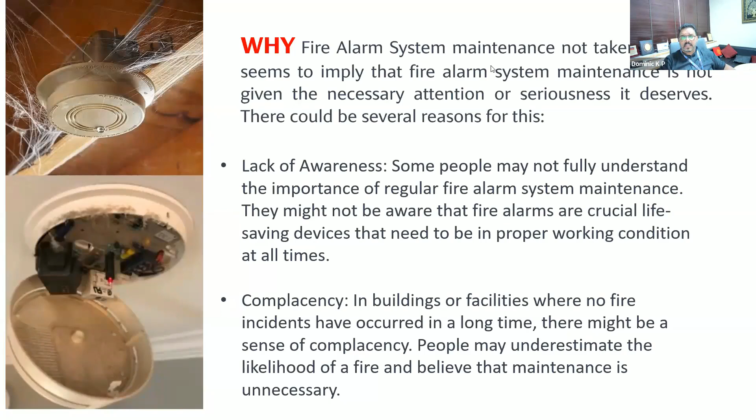In some cases, budget constraint. You go to some apartments or commercial buildings, the allocation for maintaining the safety system is so negligible. We have freelance engineers taking up AMC, and it doesn't even cover his fuel charges. Just because of the livelihood, he just takes it saying, okay, I will do the maintenance.

What do they maintain? How do they maintain a fire alarm system in a building? They think it's like any other maintenance, just clean the fire panel, make sure the LEDs are blinking, open the panel, remove the dust from the control panel and move away. Do they really open up each detector? Do they know who licensed them to test the smoke detector? Do we have a certification of engineer to certify that he is fit enough to test the fire alarm system?

Again, the lack of budget causes lack of priority, expense, because it's a non-ROI. It's not going to return on investment, so there is no question of maintaining. And again, lack of enforcement.

Our fire department today, I am from Bangalore, today I am talking from Bangalore. There is a shortage of firemen. How can you expect the fire department to come and test your building to see if the fire alarm will work? So it's quite tough for the authorities to come and check. Though it says once in 6 months or once a year the department has to come and check, then they will give NOC or renew the license to the building.

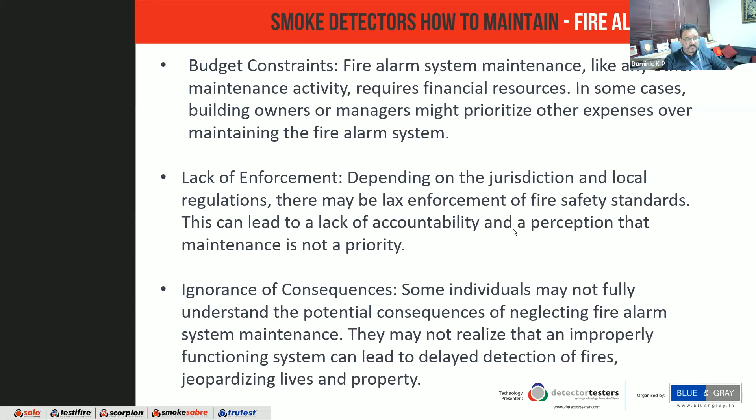How important it is for you to maintain. The fundamental question is whether you know it's a smoke detector, how does it function? The ignorance today is causing huge losses to the country, losses to the property, losses to the life.

Inadequate training. We have chief engineer electrical, we have maintenance engineer in a building, we have housekeeping guys. But how many of them are trained within the premises, not depending on the contractor to come, even though there is AMC? Are we trained to maintain a fire alarm system?

Majority of them don't know how to check the fire alarm system. Today, fire alarms are monitored by a security guard who is there temporarily. When you ask him, do you know what this is, they just say it's an electrical panel.

They don't even know it's a fire alarm system. Generally, when you read the message on the panel, it says battery switched off, alarm on different zones or floor detectors, but no action is taken. In many cases when we audit a building's fire alarm, there are a lot of faults you can find on the panel.

So it is an individual's importance, an individual interest, that we must go through a certain training process. And there's a time constraint too, everybody is busy.

Yes, when you go to a hospital to maintain a fire alarm system, they say today we have a lot of patients, you can't go remove a detector because you are obstructing the business. Though there is a contractor who wants to maintain it, our business priority does not allow us to test the smoke detector because our priorities are different.

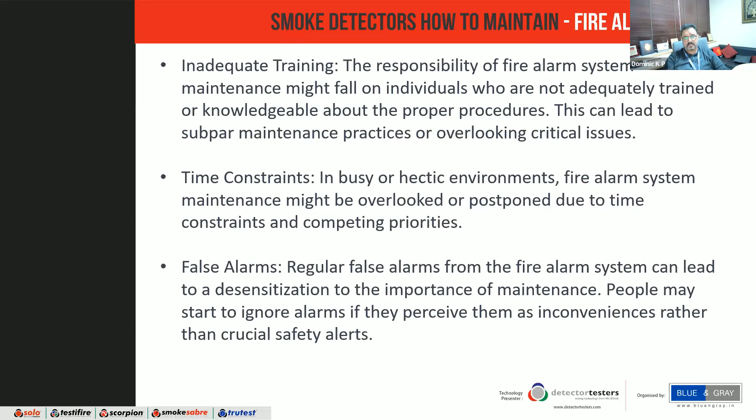So overall, ensuring fire alarm system maintenance is taken seriously is important. Today, the advancement in maintaining the smoke detector has made it easy, it's not complicated. You can get data on how it is maintained. So to make you understand how we are progressing, what technologies are catching up, and how it is enhancing you with equipment that can maintain your fire alarm system.

Please understand, just because you have a fire system doesn't mean you are safe. You need to adequately budget the maintenance cost for it. You need to have equipment within the premises to maintain the safety system, alarm system, or protection system. Do not take it for granted that nothing's going to happen to you, because you don't know what happens tomorrow.

Fire alarm is necessary to notify you if there is smoke or fire in a building. Please take this training, this webinar, seriously, because we are here to help you make sure your fire alarm does work when it is required. Let's make safety a way of life.

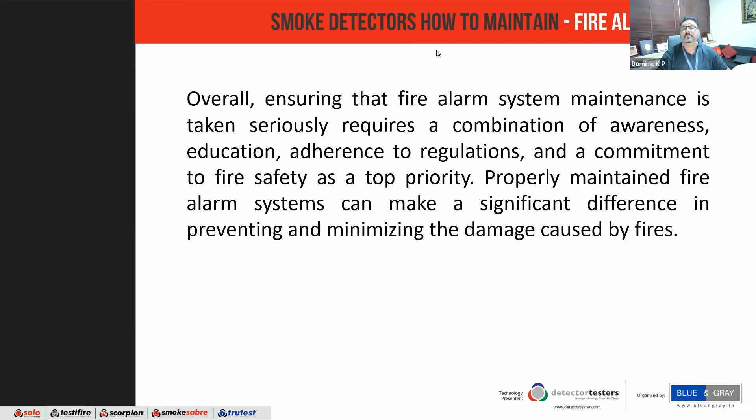I'm giving the screen to you, I'm going to stop sharing my screen. Over to you, Parul. I can't see your face, can you probably come forward? Yes, that is better. We can see your lovely face, Parul.

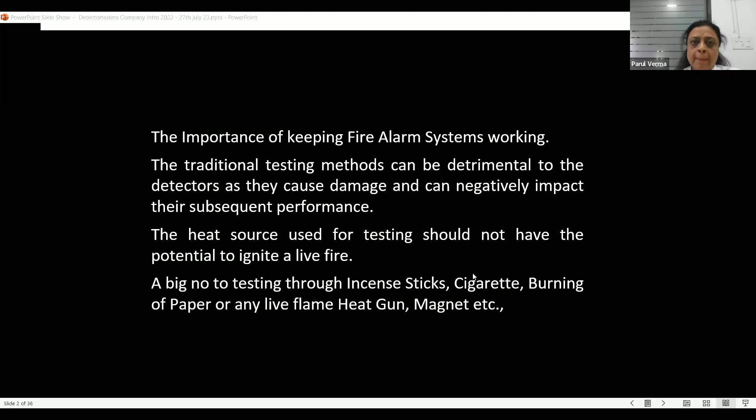So now we come to the question of why should we be testing fire alarm systems and smoke detectors. I meet so many people, and the awareness level is so low. People say, what is the need to test when we already have a fire alarm system in place? The building is anyway secured with a fire alarm system.

But no, that's not the case. You've installed the fire alarm system for keeping the occupants and the building safe. But then a functional test, why is it important? To prove that the detectors would respond when there is a fire, when smoke enters the detector chamber and communicates to the panel. Only then do you come to know whether the system is working fine or not.

When you see the LED blinking, or when you see the analog values on the panel, you conclude that the fire alarm system is working fine. But that only means the current is running through the cabling and the circuit is working fine. That doesn't prove that the detectors and the fire alarm system are working fine. We need to also test them by proper functional testing.

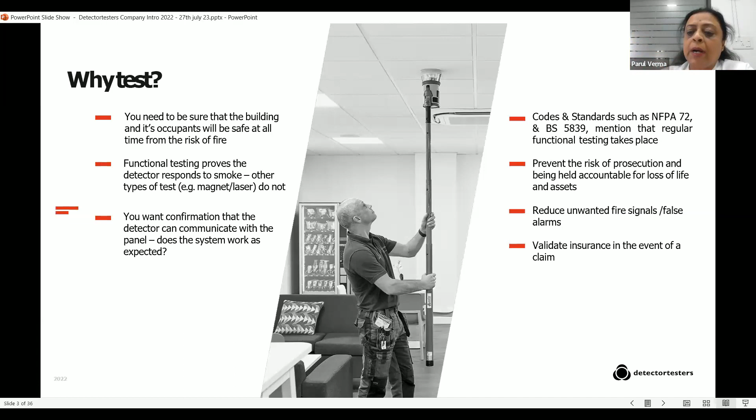Even the codes and standards mention that functional testing should be done, which will prevent not only the risk of prosecution - these days, with fire laws becoming so stringent, there is a risk of being prosecuted - but you can also validate insurance in the event of a claim. And the main thing with functional testing, which we at detector testers do, is unwanted fire signals and false alarms are reduced so much because of that.

Even the industry codes and standards tell us very clearly that functional testing is very important, yet we have never even known about this. I have been in the fire alarm industry for the past 20 years, and Dominic has been here for ages, but even we have not given the kind of importance we should be giving. That's why I took up this challenge and joined detector testers, because I understood the importance of functional testing. I thought, why not let everybody in the industry know about it and make people's lives and properties safer if we start following this.

If you see BS 5839, the industry code which we all keep hearing about in our tenders or specifications, it is at times quoted. And in this it is mentioned very clearly that the smoke detector should be functionally tested. By functional testing, they clearly say that smoke can enter the detector chamber and produce a fire alarm signal, and when this is done, it should be ensured that the material used does not cause damage to or affect the subsequent performance of a detector.

That's why I was mentioning earlier that we should not be using cigarettes or incense sticks or any such methods which can cause damage or affect the subsequent performance of the detector. Like when the detector was opened, which we saw earlier, there was a lot of contamination inside - all caused by false methods of testing.

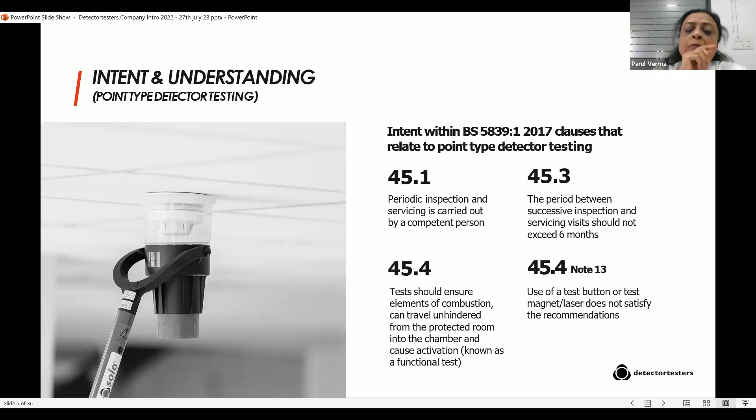Then the problems of having a fire, of course that is a different aspect - even false alarms will not happen. And the tests also say that when a test is happening, the elements of combustion should travel unhindered from the protected room into the chamber. Most importantly, it is told again and again that the smoke or heat should enter the detector chamber - only then will it respond and inform the panel that it's actually a functional test.

Now from BS 5839, let's go to NFPA 72. Even there, it is very clearly stated. We use UL listed detectors, but why don't we follow this when it comes to testing? It is so important that we test smoke detectors to ensure that smoke entry into the sensing chamber happens, using a listed or labeled product. It clearly mentions to use a listed and labeled product. We don't do it - we use incense sticks, which is so wrong. Then we go around saying the detector was not working when the fire happened, but when we are not testing or maintaining the detector, how will it work?

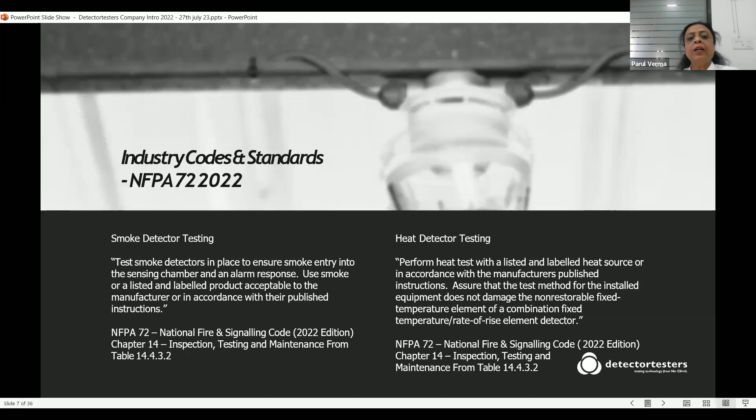The same goes for the heat detector. Again, NFPA says the same thing - perform heat test with a listed and labeled heat source or in accordance with what the manufacturers are publishing. If you look at manufacturers' publications, whether Notifier or Siemens, they also clearly state to use a proper testing method and ensure the test method for the installed equipment does not damage the detectors or cause any problems in their performance thereafter.

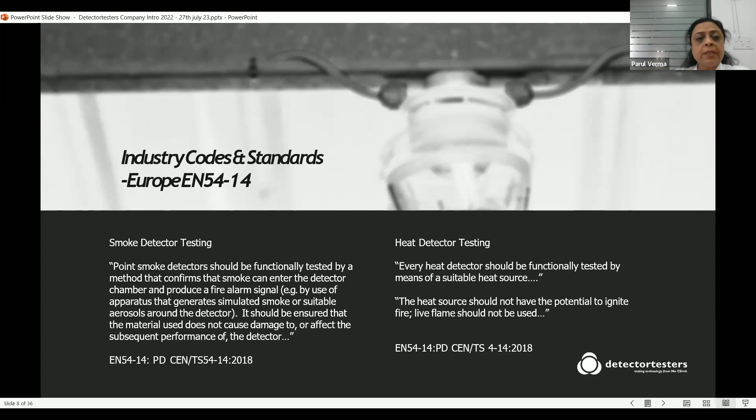If you look at the EN54 standard, the European standard where we are using EN detectors too, it again says point smoke detectors should be functionally tested. Everywhere, every code mentions functional testing, which none of us are aware of. We should start taking this very seriously, so that smoke can enter the detector chamber and produce a fire alarm, ensuring the material used does not cause damage or affect subsequent performance. This is so repetitive - every code and standard mentions the same things again and again, but we have never given importance to this. Let's all start giving importance to it.

Even our Indian standard, IS 2189, clearly says each smoke detector should be tested to initiate an alarm at its installed location with smoke or other approved aerosols. It says 'approved' - a very important word which we always ignore, thinking we can just use an incense stick, agarbatti, and it'll be done. No, that's not the right way at all. We should use proper functional testing with proper labeled and approved means of testing. The methodology should be approved by the manufacturers, and it should be properly labeled and approved.

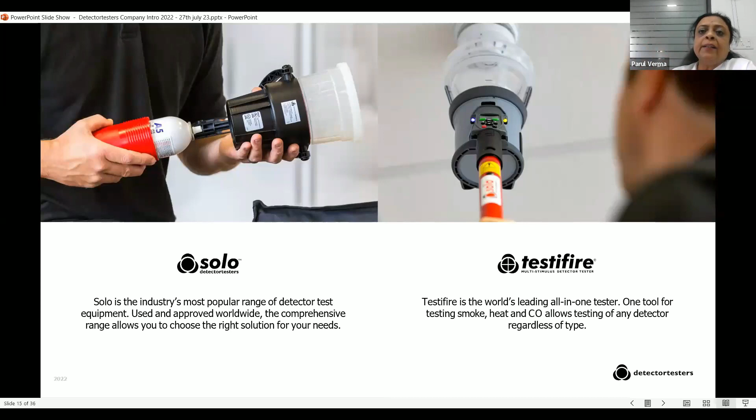Then we have the Testifire, the world's leading all-in-one tester. We call it the all-in-one tester, or multi-stimulus tester, because it is one tool with which you can test smoke, heat, and CO, and it also allows testing of any detector of any type and make.

Then we have the Scorpion. This is the solution for buildings with hard to access areas, suitable not only for point detectors but for ASDs too. Scorpion ensures that all detectors can be tested regardless of their location. I'll come further down to tell you which locations are hard to access.

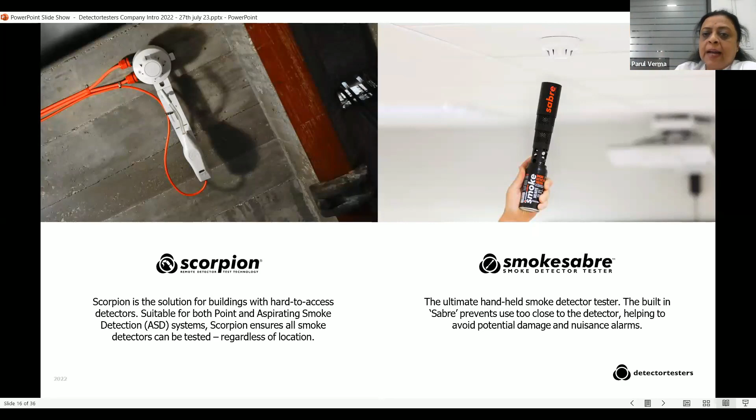Then Smoke Sabre is the handheld smoke detector tester. It has an inbuilt sabre so that it prevents usage too close to the detector, which can cause damage to it. To avoid any such damage, we have the Smoke Sabre.

Going deeper into the Testifire, it's suitable for smoke and heat testing, and it increases productivity on site. Normally you'd take a ladder, with one person holding it and another climbing up, lighting an agarbatti or spraying aerosol directly, which is also a wrong method. This saves a lot of time, increasing productivity, and it's the most compliant testing material for multi-sensor detector equipment.

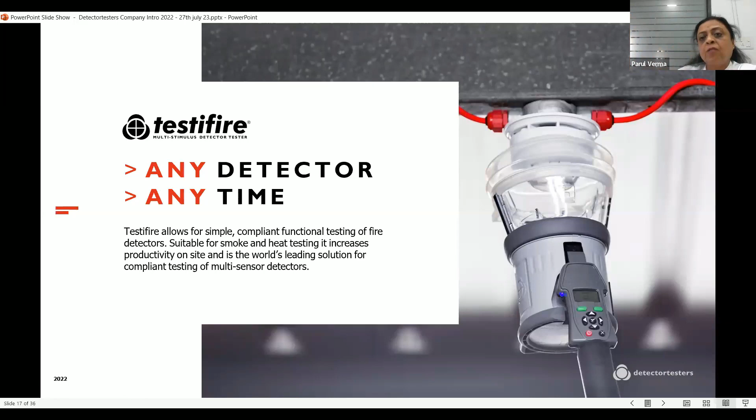With the Testifire, we have two models: the Testifire 1000, for smoke and heat, and the Testifire 2000, for smoke, heat, and CO. You can see the pictures on screen - there's a small compartment on the side where a smoke capsule is inserted, which releases controlled smoke so there's no possibility of over application.

We also have battery batons, the black ones below, which power the testers. Then we have two heat outputs - one that goes up to 90 degrees Celsius, and for high heat areas like kitchens, transformer rooms, or other high heat potential areas, there's a setting that goes up to 100 degrees.

Then, of course, we have the carbon monoxide feature. This bigger model, the Testifire 2000, houses the smoke capsule in the upper compartment, and below it has the CO capsule, used for carbon monoxide detectors in basements or similar areas. There's also a clearing mode. The best part about the Testifire is that it tests not only the smoke and heat detector.

This can do simultaneously or sequentially. Accordingly, you can set it to use smoke then clearing mode then heat, or you can do smoke, heat, and clearing.

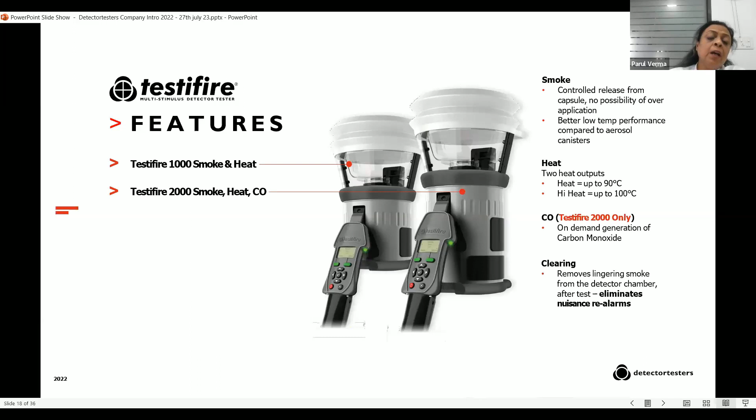Each battery baton can test for 2.5 to 3 hours. One fully charged battery baton can operate, and then it can be recharged like we recharge our phones - in 30 minutes it's fully recharged again.

Then we have the Scorpion - the solution for buildings with hard to access detectors. It is suitable for both point and aspirating detectors, and you can test them regardless of location, like lift shafts, ceiling voids, secure rooms, stairwells, under escalators. Normally, as you see, this detector is permanently installed close to the detector.

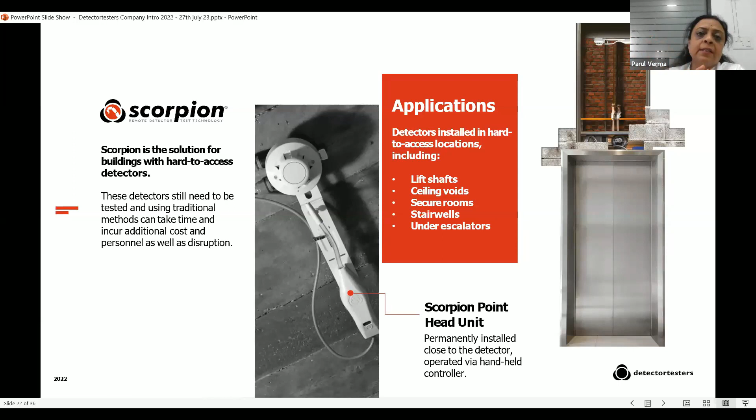It's operated via a handheld controller. There's a tubing system - the tube goes out and comes down if it's above the ceiling or above the lift shaft. Normally we avoid testing these hard to access places, but you have to design it in along when designing a fire alarm system. When detectors are being considered wherever above ceiling, you have to account for these accordingly.

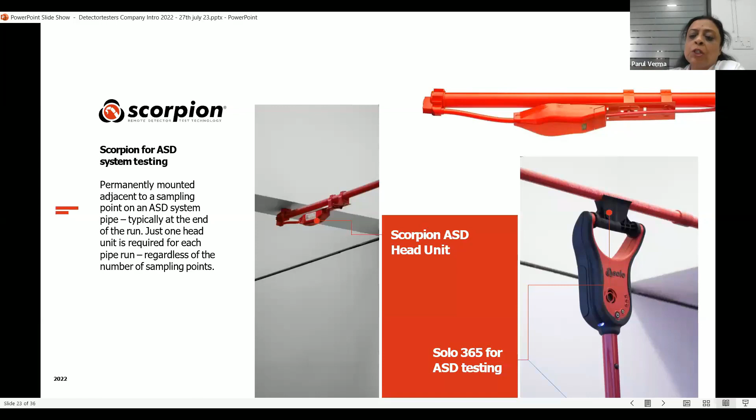This is the ASD system I was talking about, which can be permanently mounted adjacent to a sampling point. The above one is the Scorpion ASD head unit. And here, this is the Solo 365, which I spoke about - that is not only for point smoke detectors but also for ASD systems with an entire pipeline. Just one head unit is required for each pipe run, regardless of how many sampling points you may have in one tube.

Then when we come to dispensers and aerosols, for the aerosol, which is the Solo brand - people at times end up doing direct spraying from the aerosol cans, which is not a proper method. We should use the aerosol along with the dispenser, which comes in two sizes, 100 mm and 180 mm.

These are lightweight and swing frame, depending on the size of your detectors. Why swing frame? Because then you can use them at any angle, whether on a wall or where there's some kind of hindrance in between - you can use them accordingly.

Parul, one second, I'm just putting a pause on this slide. Now, generally, what we have said - buy the can, which is cost effective, and spray at a distance.

We lost you, your signal. I don't know whether my signal is weak or your signal is weak. We can't hear you. So can you hear me now? Yeah, I can now.

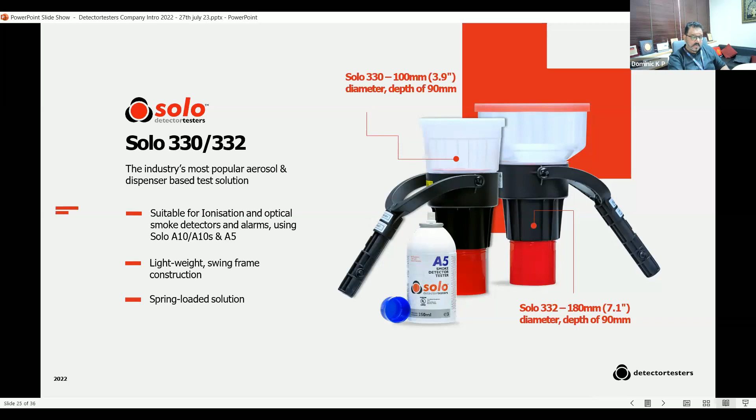These aerosols are also approved by the detector manufacturers, which is very important. That's very good information, because detector manufacturers should have approved these. So what you're saying is it is all approved by the manufacturer of the detector, and it is also UL listed.

Yes, that's what we mentioned very clearly. Use only approved aerosols, and aerosols should be used with dispensers and not contain silicone. Silicone again causes harm to the detectors, and at times we don't know what we are buying locally.

And then even for carbon monoxide, we have these cans which can also be used with the dispensers in the same way I was talking about. So for this we have this Solo C3 for basements and wherever we have parking areas where we use carbon monoxide detectors, we can use this.

And even in Testifire, like I said, we have two models: one is for smoke and heat multi-detector tester, and one is for smoke, heat, and carbon monoxide. So when you go for a Testifire, you're going for a single unit which can test all three types of detectors. Whereas if you go for a solo, you will have to buy smoke aerosols separately, and for carbon monoxide, carbon monoxide aerosols separately, and for heat testing, you will have to buy a third equipment, which is the industry's most popular standalone heat detector tester.

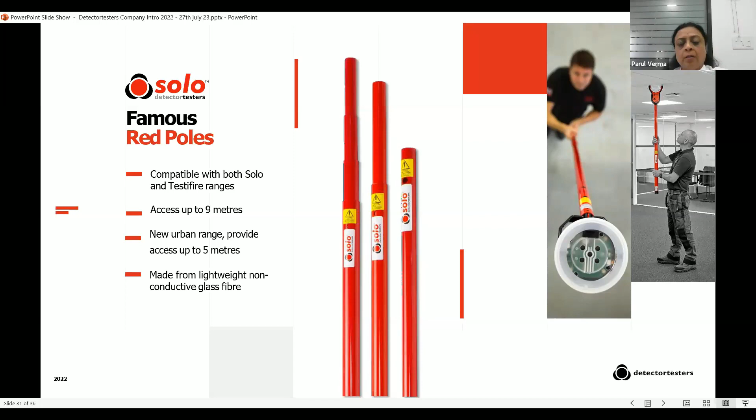Then we have these sleek maintenance kits wherein engineers can keep them and move around easily, and it looks so professional. When your fire alarm systems are UL listed and EN 54 products, then why not even use your testing equipment, which is UL listed and so professionally carried around. Like Dominic was saying earlier, people will say they don't want this, they don't have the time. But you don't need to have time, and you don't need to vacate areas.

In hotels or any of these places, when room maintenance is happening simultaneously, this can happen. It'll hardly take 5 minutes to test your smoke detectors or test anything. So along with the room being cleaned, this can be tested, and they can just walk out. You don't need to stop any work, operations, or disturb your guests.

When people are spending so much money on hospitals, hotels, airports, even the interiors and flooring, then you're carrying ladders and using scaffolding, that can cause a lot of harm to everything else. So it's not just for safety and security, even aesthetics matter a lot.

Parul, the kit that you are showing here is so useful. Generally today, when we maintain a smoke detector the conventional way, you need two or three guys. You need a ladder, and two guys to hold the ladder. One guy going up, and one lighting the agarbatti or carrying the jute box. Generally, the whole area where smoke detectors are being tested becomes a mess.

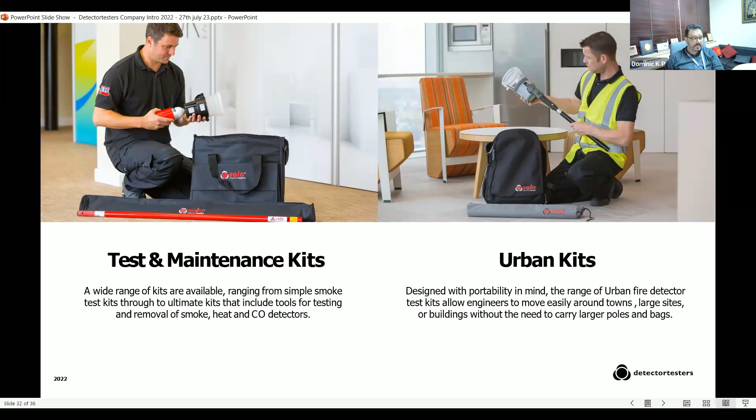Then we have the Solo 200, which is a removal tool. This allows for very simple removal. If you see the picture, there are three kinds of colors.

Once you test the detectors and if the alarm sounds, that means your detectors are working fine. If your alarms don't sound, that means there is some fault in the detector. Please remove it with the removal tool.

The same pole can be used on this, and it can be used at any angle, however difficult or hard to access. It is movable, so you can just insert it, remove the detector, clean it, again install it, again test it. All this will take a total of 10 minutes, I think, the maximum.

And then if your detector works fine, that means it was dusty, it was dirty, it's been cleaned, it's been installed. And if it still doesn't work, that means your detector is faulty, you just need to replace it. All this is so simple, so fast, and so efficient.

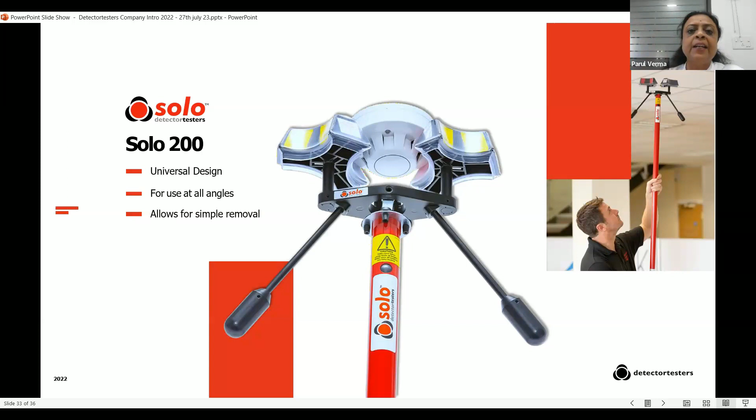You're doing your functional testing, and it will give you so much peace at night that your fire alarm systems are working fine, 100% fine. The functional test gives you that kind of freedom.

And then the aerosols, again, handheld aerosol is the Smoke Sabre. If you see the Smoke Sabre, it comes fitted with the aerosol cans, and then in the middle there's a slight kind of saver which you just, with a flick or press of the button, releases the smoke. So only that much, it depends.

Your detector sensitivity level can be set according to that. This will react, so you can spray it once or twice or thrice until it does. So this is for infrequent people who do infrequent testing in small offices. For that this is used.

This is also approved by the detector manufacturers, and these are also compliant to all the latest regulations and codes, and they are silicone free, and they do not leave any harmful residue like other aerosols. They come in 2 sizes, these are for smaller jobs, as already mentioned here.

Having run you through all the codes, standards, and all about our products, and how they all work, I hope I have been able to convey to all of you the importance of functional testing. For a fire alarm system, the detectors are so important to be kept healthy all the time. So thank you very much for all your time, and I hope this session has been as informative as I wanted it to be.

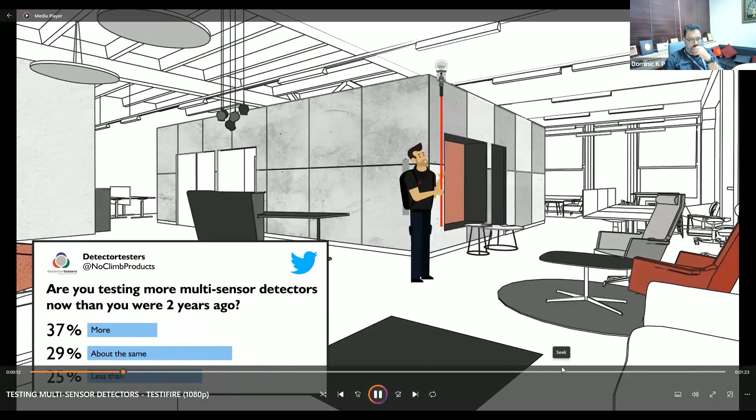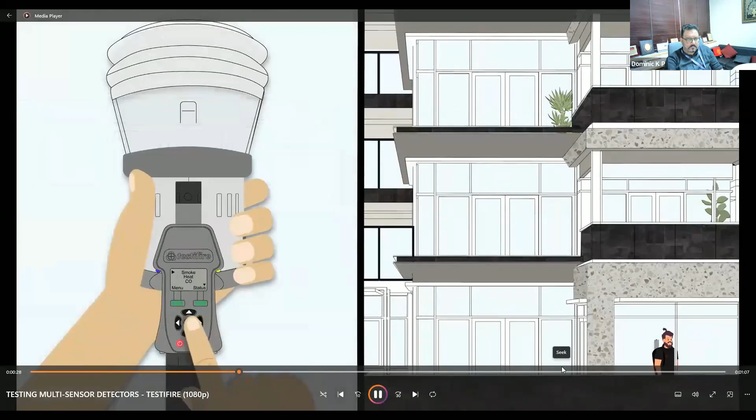With multi-sensor detectors becoming increasingly popular, the ability to test each sensor in a fast, compliant manner has become even more important. The rise of multi-sensors has been recognized within industry codes and standards, which call for each sensor to be tested individually. Testifire, the all-in-one tester, makes this simple. By offering the ability to test smoke, heat, and CO sequentially or simultaneously, Testifire dramatically speeds up the test process, ensures all sensors are functioning as designed and are ready to respond in the event of a fire.

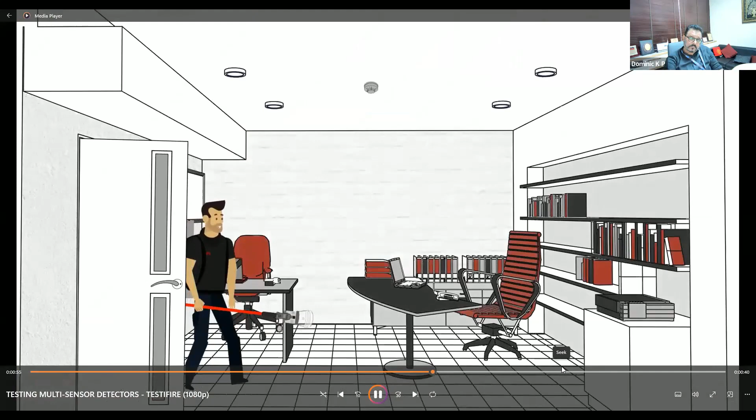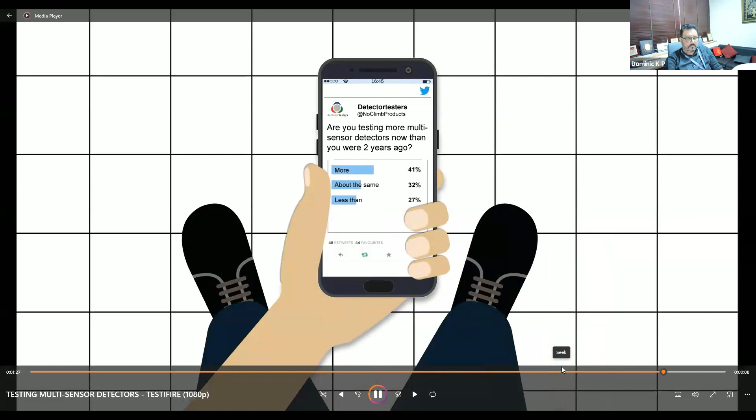As an all-in-one test tool approved by leading detector manufacturers, Testifire takes away the need to carry multiple tools on site and ensures you always have the correct tester to hand, regardless of detector type. The use of non-pressurized capsules makes for easier transportation and storage, whilst the controlled release of smoke and CO leaves less wastage and ensures detectors are safe from the possibility of contamination. Standout features, including the clearing mode and the ability to test heat sensors up to 100 degrees Celsius, help relieve the frustration of re-alarms and improve productivity on site. With 41% of fire engineers reporting a rise in the number of multi-sensor detectors they are testing, and with industry research proving these detectors help reduce false alarms, the use of multi-sensor detectors is expected to continue rising. Make sure you're prepared.

So that is testifire. What is testifire? With multi-sensor detectors increasing, what Parul was introducing is the testifire, which is one single tool to test the optical smoke detector, multi-sensor, and CO.

So testifire looks more advanced, and I'm sure they're coming with data. You can store it, and soon you'll be launching where you can gather all the data of the testing of the detector, download when these detectors are tested - which today is not seen or heard by anybody. Using testifire makes a lot of sense, because it's one tool, much easier for your maintenance team to carry in a building, and you get the information about when it is tested and what is the condition.

So wonderful Parul, very lively and very informative. That we did in the past by British people came, but you've done a wonderful job and very easy to understand. Thank you for organizing it.